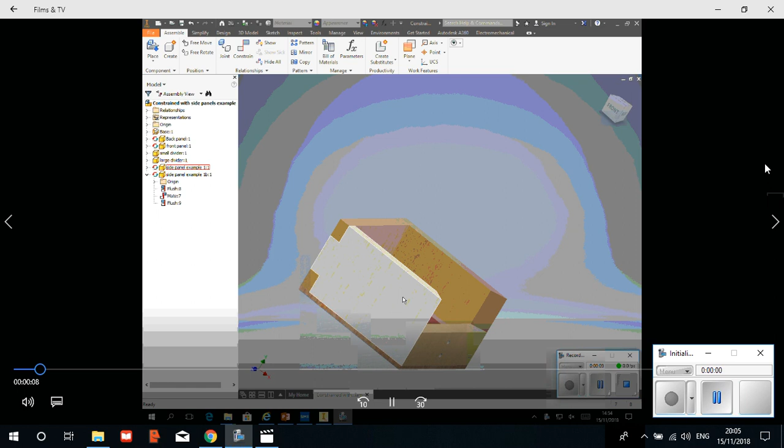Hi guys, so you will hopefully have placed and had time to assemble different parts to come up with a design that looks something like your desk tidy. If you've done it right, it will look something like this. As you can see, I've added material appearances to it. Feel free to do that yourself.

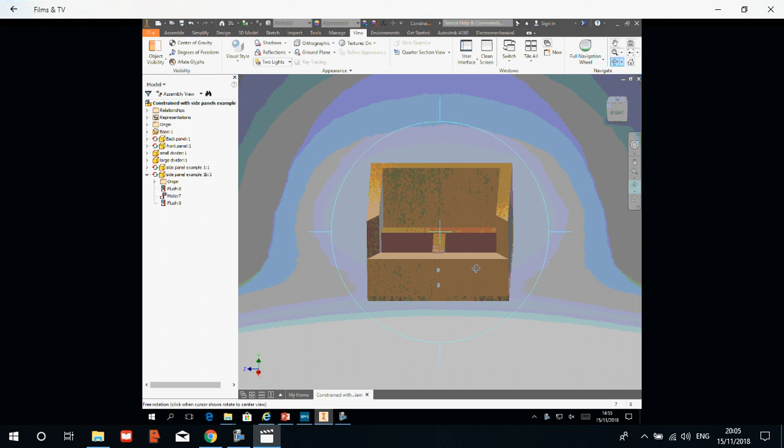What we're going to do now is add designs to the left and the right hand side. You'll notice they stick up above the front, much like yours would if you hadn't cut it to size. If you double click on the side panel, you'll see they're both different. You've got your left hand and your right side that you placed earlier. Left hand mouse, double click, and you'll see that it brings up this part.

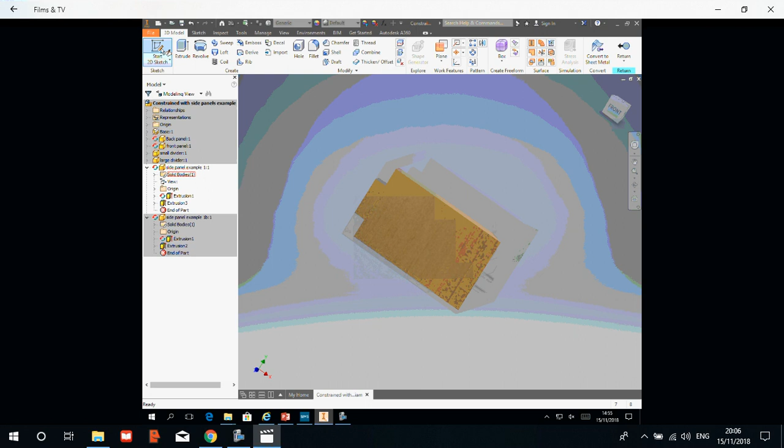We can now edit it. Start a sketch on the surface. It will rotate into view and you can zoom in if you want to. Now we want to be at the top here and further down at the front.

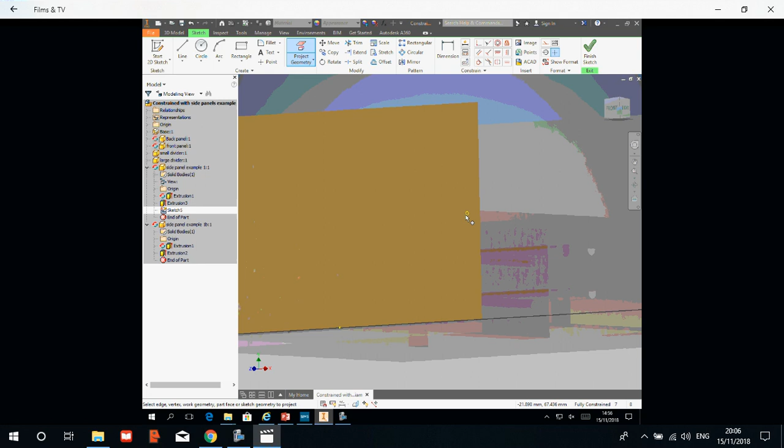If you go onto project geometry like I've just done, it allows you to borrow lines from other parts. We need the one that shows how far up it is on the front. This one here, it'll show it in yellow. You can spin back round and you'll see where you need to join up to.

We've got the top bit on the left and we've got this bit here. We want to do a pattern in between. You can use the line tool and click, click, click to come up with a funky zigzag. Click OK if you have done that.

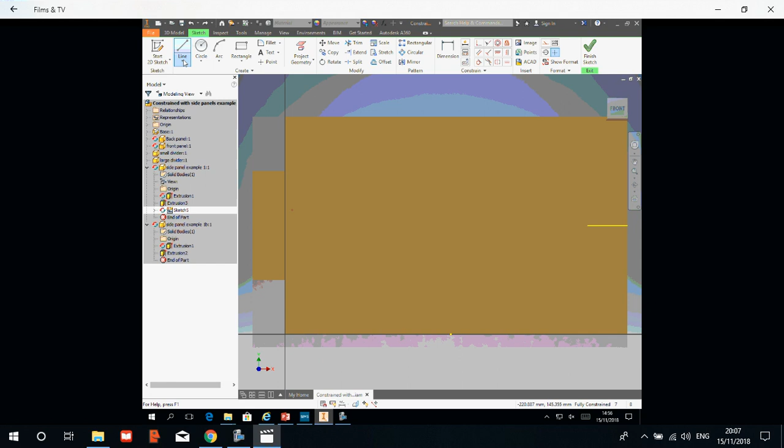You could use the spline tool. If you use this down arrow here, it gives you lots of options. The spline tool is a curvy line that you basically click and maneuver about afterwards. You want to start up in the top corner, click, click, click, make something cool, and then join it up. To stop this one, you need to click this little arrow that appears here. You can use the nodes to drag and move this around after you've drawn it.

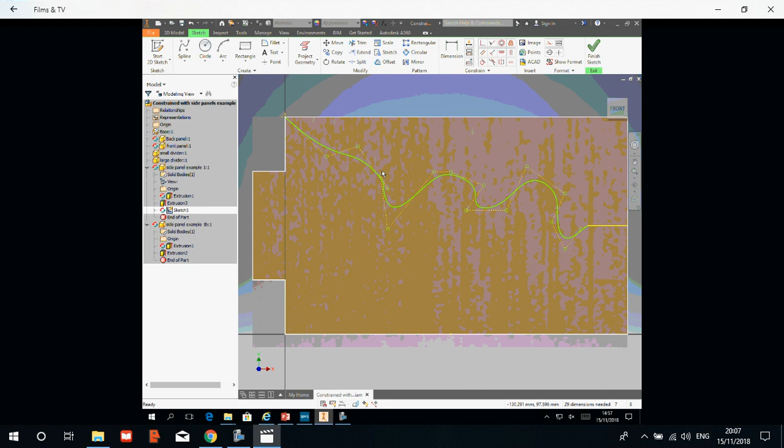Okay, now we have drawn a line on the side. Click Finish Sketch and you'll see it goes back to 3D mode. We could, if we wanted, extrude, but because we haven't drawn a whole shape, we've only drawn a line, it doesn't know where to extrude.

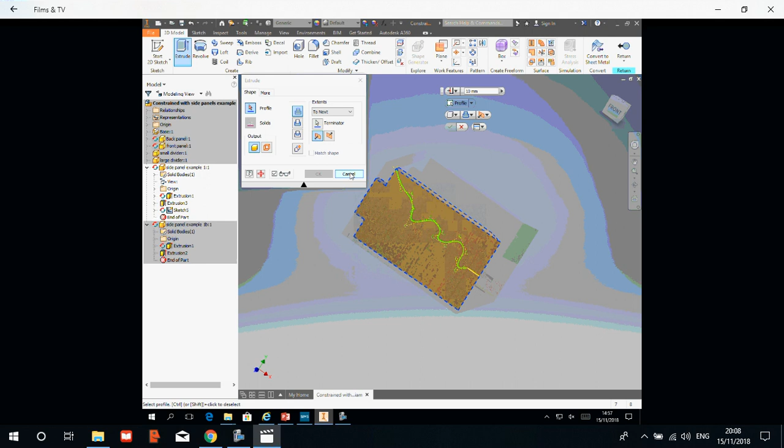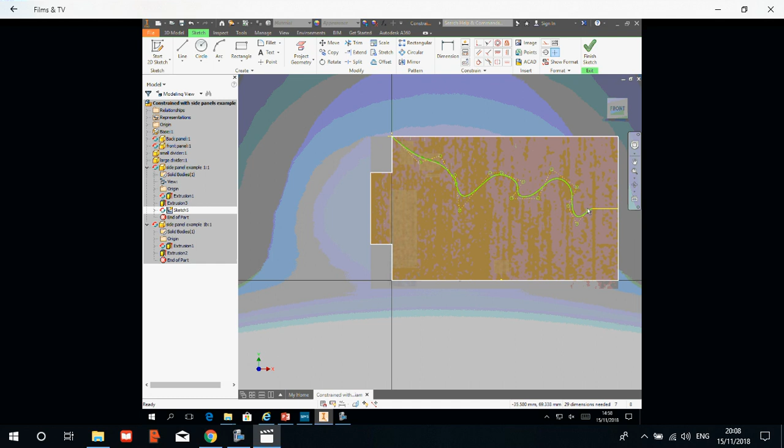If you want to make the whole shape, you double click on the sketch and you add the lines to make it a whole shape. So I'm going to go across the top and down to the line at the front. That is now a whole shape that can be selected and extruded. So finish sketch, extrude, and it will now be able to pick up that shape.

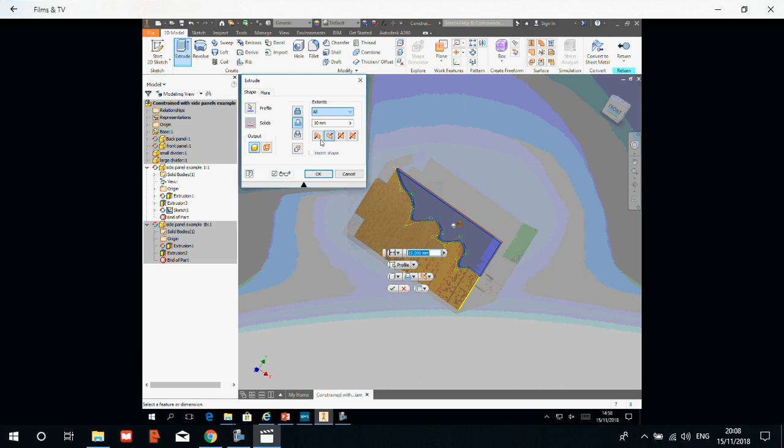Now the way we've got it at the moment is trying to add material. We want to cut material away, and we don't want 10mm, we want to get rid of all of the material. So you go down to all and click OK. It will cut all of that off. Go up to return, and then if we turn it round with the orbit tool, you'll see it's got the shape all the way through.

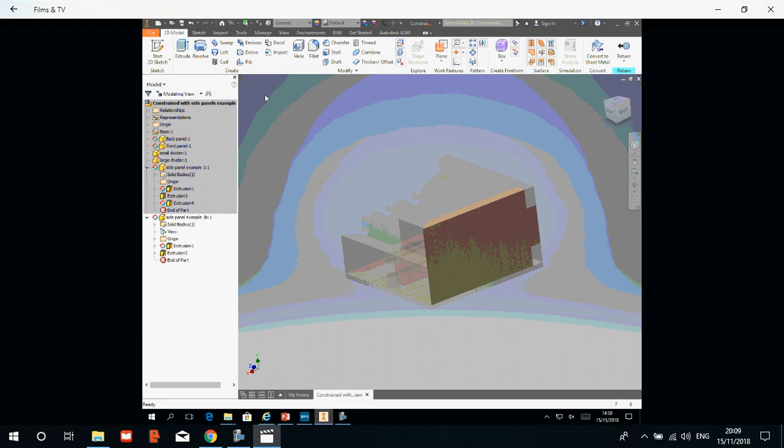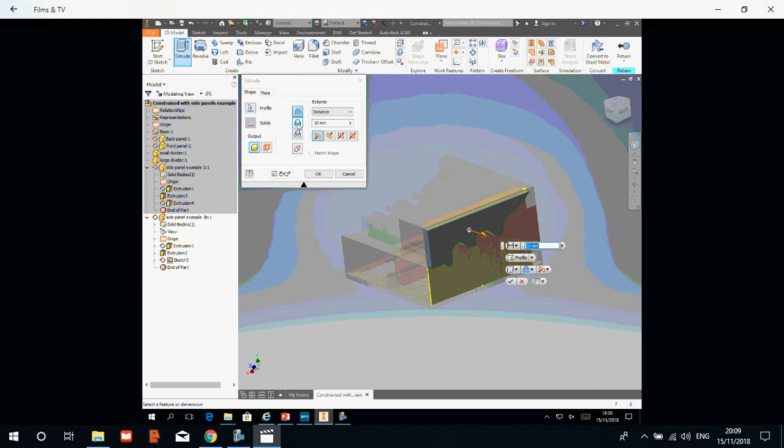Now we obviously want the same thing on both sides, so we're going to do a sketch on this panel as well. So double click on the other side, you'll see it's brought it up. Start 2D sketch on it, and we're going to project geometry again. This time we can pick the line that we drew before on the opposite side, as well as the others. So finish sketch, and then we want to extrude this portion but cut the material all the way through. Right, so that is both sides done.

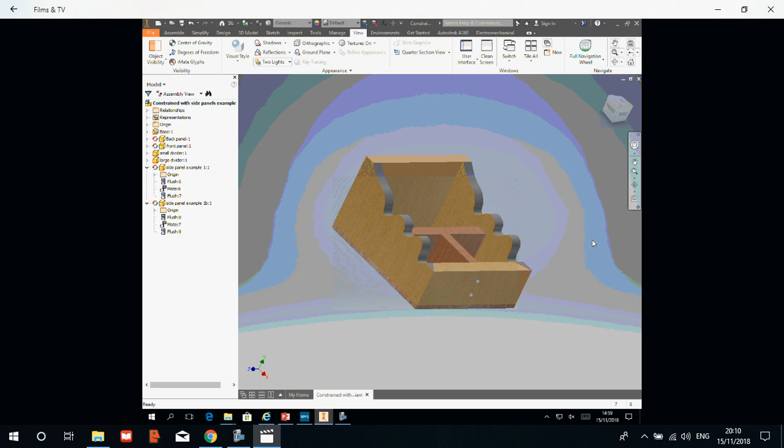Now you guys obviously came up with more than one design. What I would like you to do is save this and then have a go at saving various different files, different copies that each look different. So File, Save As, for example, panels 1, panels 2, 3, 4, so that you've had a go at lots of different designs on the side. Okay, have a go.